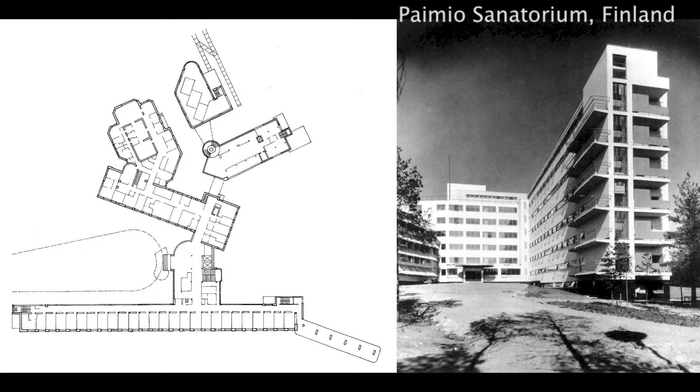In 1922, before World War II, Peter Behrens started the International Style in Germany. During the earlier century, the International Style existed throughout the world as a mindset with characteristics that unify and are comprehensive. Architects around the world came up with new architectural solutions that incorporate traditional practice with current social demand and technology. People were also becoming unhappy with past decorative elements that were plainly for aesthetic and had no relation to building functions.

Louis Sullivan's design philosophy puts more importance on the practicality of the design than the aesthetic. He also believed that the exterior of a building should reflect its interior functions and structure.

Adolf Loos believed that ornamentation disrupts the true beauty of a building, which is the building's form. Therefore, detailing and aesthetic values are added through rich material.

Ludwig Mies van der Rohe's principle is that simplicity and clarity leads to good design. Philip Johnson's stand is that design should be one that can be built with clear functions, and not just a fantasy of the mind.

The formation of the Congrès International d'Architecture Moderne marks the beginning of the International Style as an academic platform. In the first meeting, the Architects' Declaration was made. It emphasizes economic and political issues in relation to buildings rather than historical architectural formulas. It also accentuated society's needs rather than individuals.

The new International Style by the new pioneers was a distinct branch of modern architecture influenced by Cubist and Neoplasticist painting. Walter Gropius and Marcel Breuer arrived at the Harvard Graduate School of Design to extend their influence and promote Bauhaus as the primary source of architectural modernism.

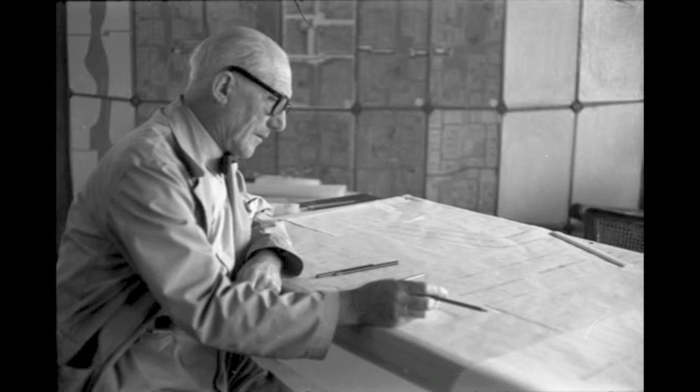Le Corbusier once stated that a house is a machine built for living. Nonetheless, he strives to bring nature into the structure. Le Corbusier's design philosophy also speaks very much about architectural proportion. This ideology is heavily inspired by mathematical concepts used by Leonardo da Vinci.

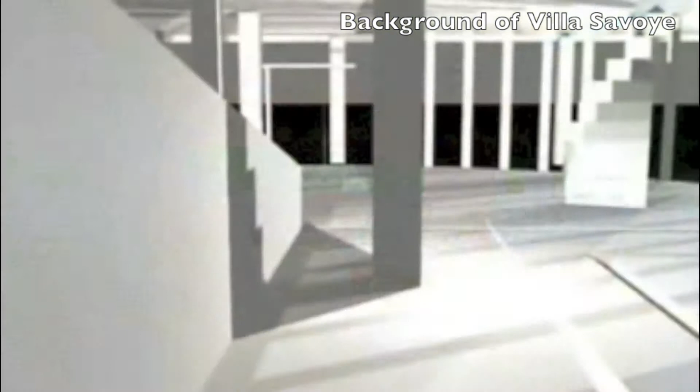Villa Savoye is a classic example of the early International Style architecture that demonstrates Le Corbusier's 5 points of architecture. The construction took place from 1928 to 1931 in Rue de Villiers, Poissy, France. Since its completion, Villa Savoye has been renovated several times.

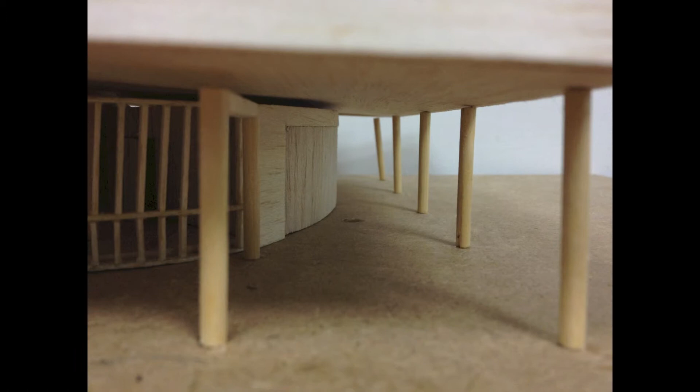Le Corbusier implemented pilotis into the construction and design of Villa Savoye. Villa Savoye is raised on stilts to separate it from the earth, as well as to maximize land efficiency. This gives support to the structure and also enables the construction of a free facade building.

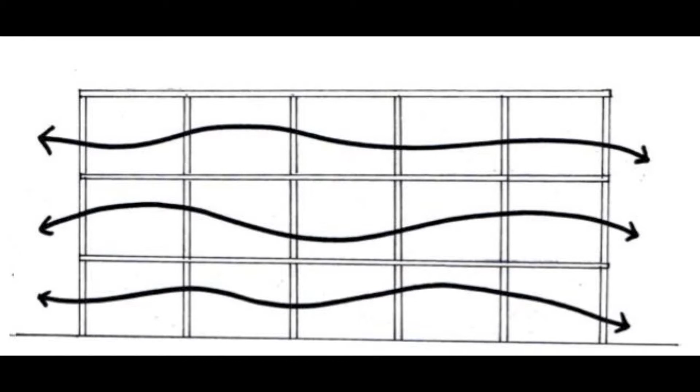As the building load is placed on the concrete stilts, walls are no longer used as principal support for the building. Thus, this gives more flexibility to designing and exploration of the building.

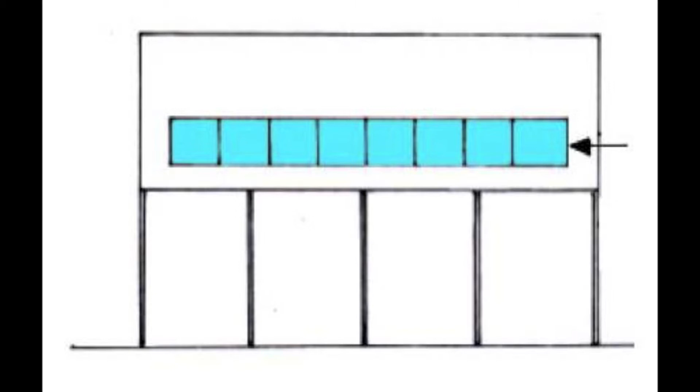Ribbon window is another advantage by using concrete construction and pilotis. Not constrained and governed by load-bearing walls, windows are made possible to run through the length of the building.

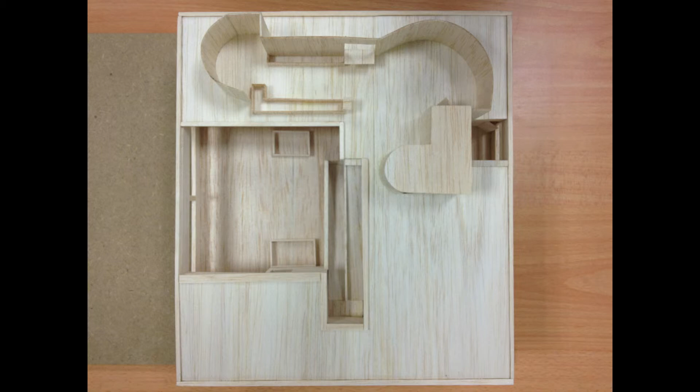Le Corbusier believed in compensating for the loss of ground space by creating gardens and terraces on roofs and extending the living space outside. The flat roof becomes a terrace area that can be functional. This gives practicality to the roof garden, and not just beauty of the building.

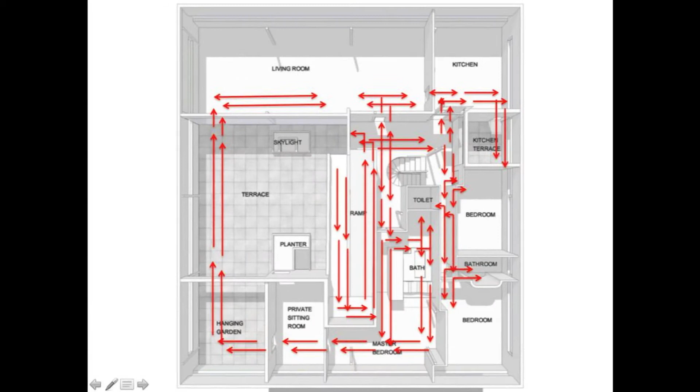The space inside Villa Savoye is open and connects to one another effortlessly. There isn't a clean-cut differentiation of space, giving more flexibility in the spatial quality of the building.

Villa Savoye is free from ornamentation. Instead, decoration is included through the use of various materials. For instance, the bathroom uses a variety of tiles that give it more character.

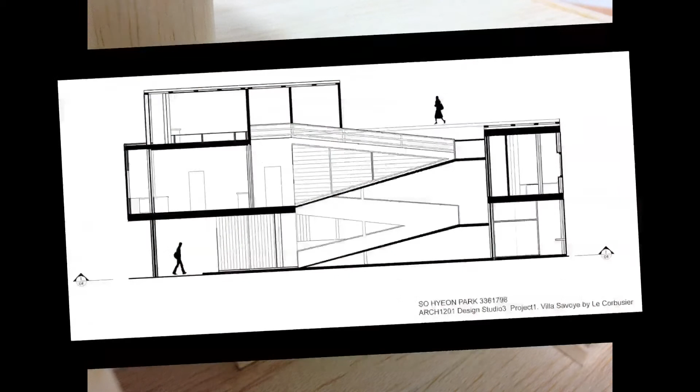Ramps and stairway connect each of the floors of Villa Savoye. As the building load is lifted from the walls, such flexibility can be produced in a building.

In a nutshell, Villa Savoye is a masterpiece of Le Corbusier that successfully portrays the International Style, thus becoming one of the pioneer buildings of that movement. The International Style holds on to the principle of expression of volume rather than mass, where functionality and practicality are highly applied. This enables it to be easily adapted and applicable everywhere, thus becoming a globalized architecture style and is well embraced until today.